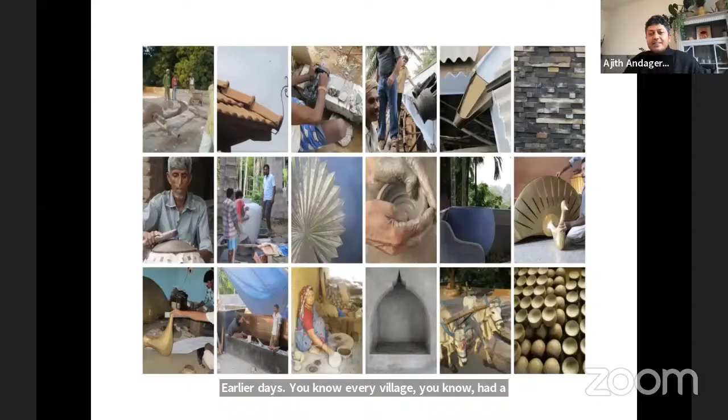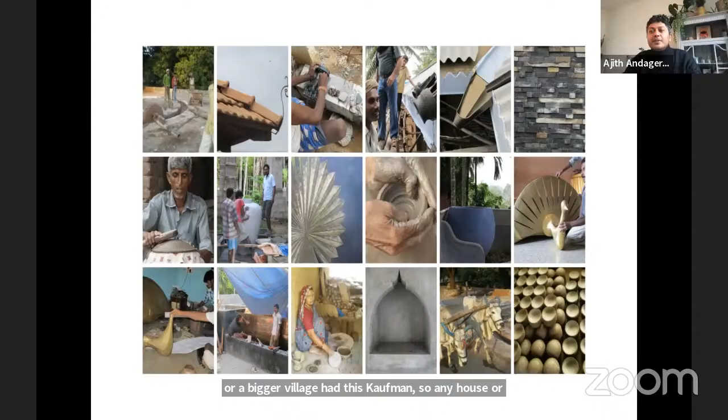So these are the images of various craftsmen. In earlier days, every village had a mason, a potter, a carpenter, a blacksmith, and of course agriculturists, who would need a house. So they worked with these 4 to 5 craftsmen. It was a barter system. Every village or bigger village had these craftsmen, so any house or building in that village or in the surrounding taluk or hobli was built by these people.

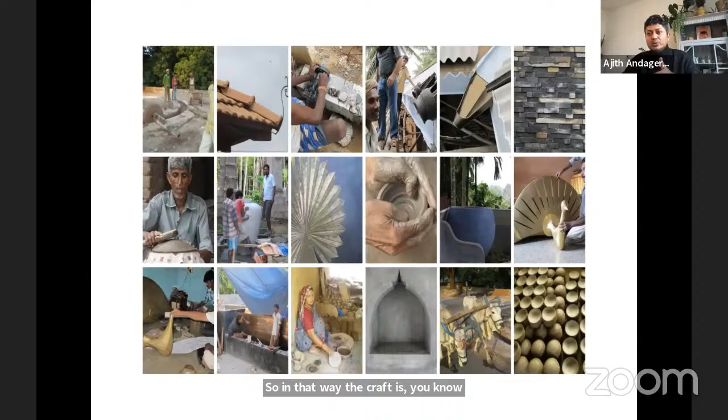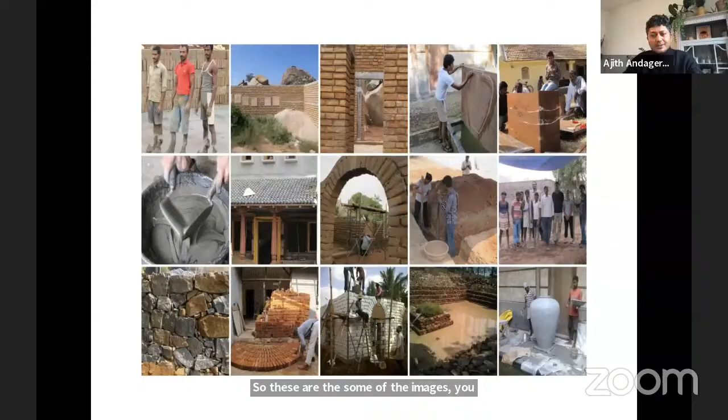So there was a craft developed over the years based on the climatic condition or the material available. In our projects today, we are trying to use these people to build modern structures. In that way, there is a continuation of the craft. Through architects and builders, we support this craft. These are some images from different projects of ours in various parts of India. We build mainly with earthen, local material. I will get to the material part a little later.

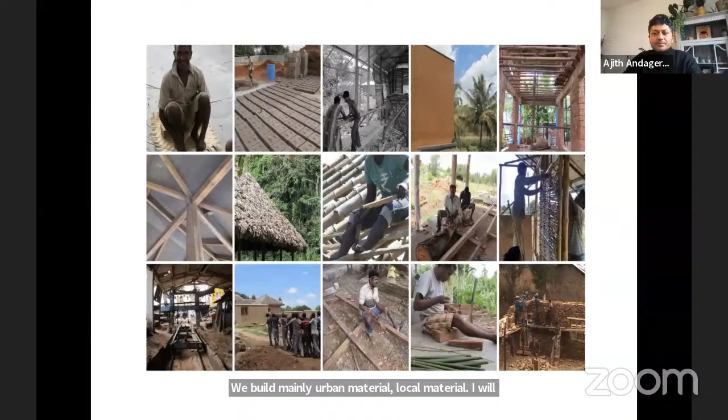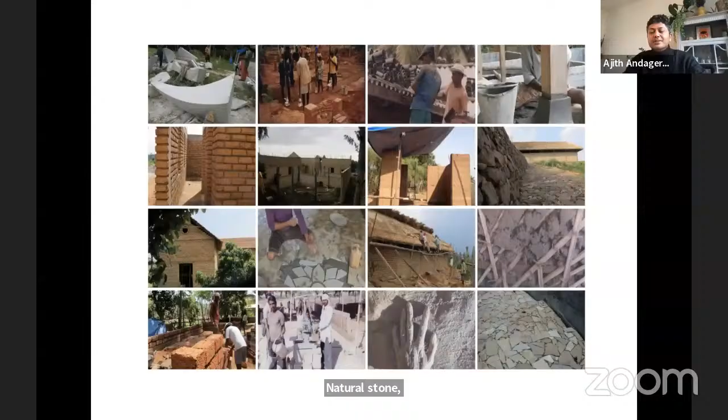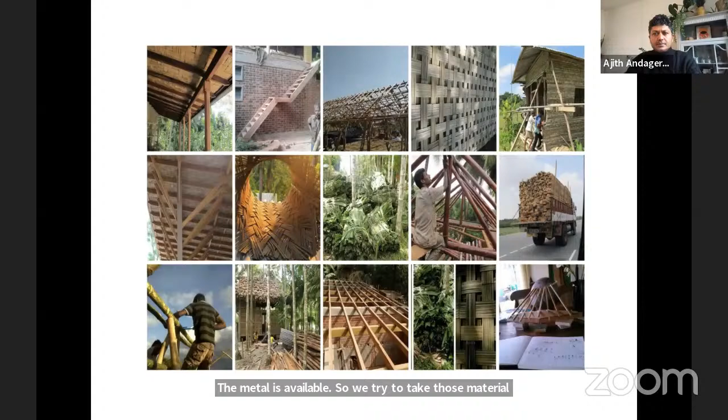You can see mud has been used, thatch, bamboo, cow dung, natural stone, laterite stone, granite, based on whatever material is available within a 50 to 100 kilometer radius of the site. So we try to take those materials to the next level in our buildings. We also extensively use coconut timber and arecanut. Coconut timber is a non-forest timber.

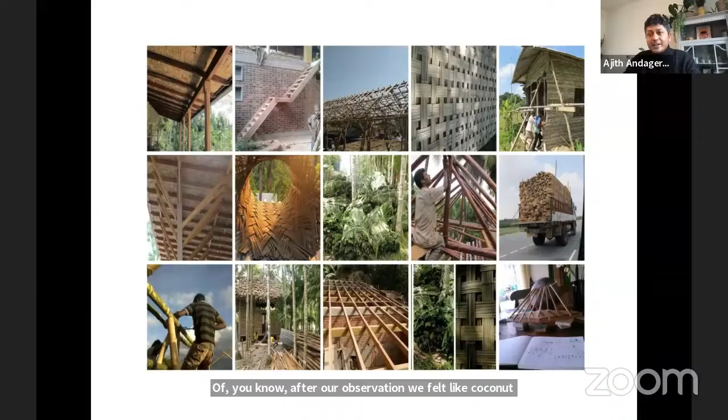That means we use wood, but we try not to use forest timber, because when we cut a forest tree, it has to be balanced. A lot of the time we don't have control over whether it's planted back. That's why we use a lot of commercial crop, where a farmer has a coconut farm. After 50, 60, 70 years, he's going to cut it and replant a coconut. After our observation, we felt coconut timber is amazing timber if it is utilized in the right way. So we are part of the whole life cycle of the tree, where we give a use to it.

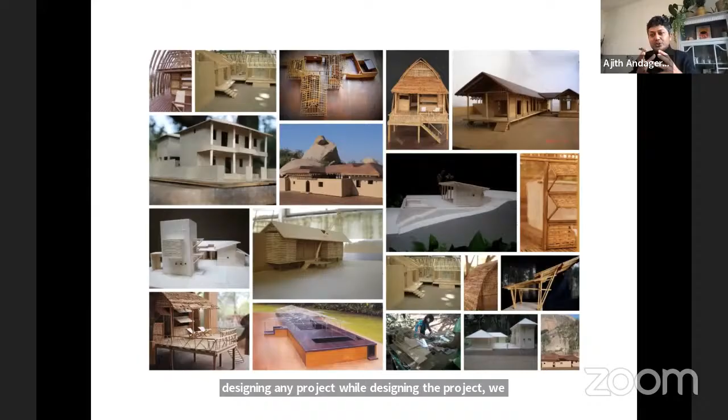These are some of the scale models we build. While designing any project, we build a study model to understand whether our design fits in three dimensions, the proportion, the height. The scale model is all handmade, not 3D printed. We still believe in building with hand, so we can relate the wall or the roof with a proportionate height. And once the design is finalized, we build a final model. It can be in wood, balsa wood or plywood.

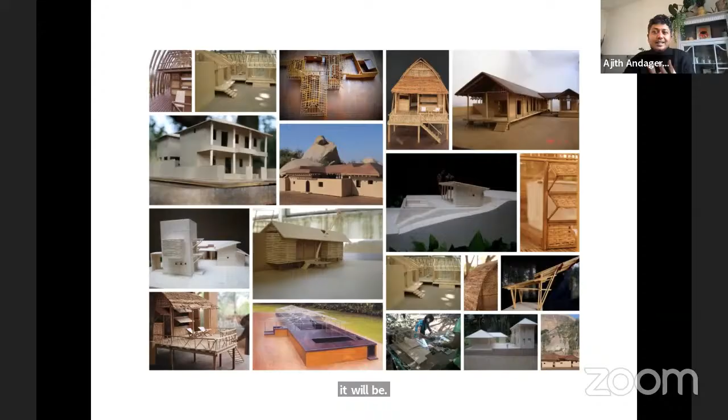Then, to a detailed level, we keep it on site. So a builder or a carpenter, even us, every time we visit the site, we understand what we thought of and how it will be. It will be helpful for the builders to understand, oh, this is how it looks eventually, not just by showing two-dimensional drawings.

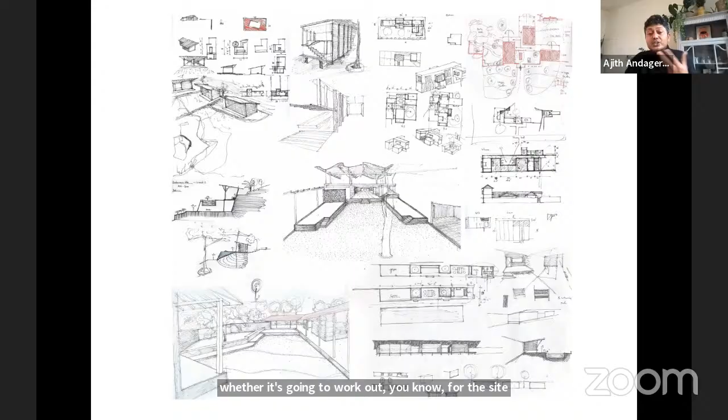At every stage we do a lot of sketching. So as an architect, what does an architect do? We are trained to visualize the entire form of a building before even building it. That's what we get trained in college and after in practice. So sketching is one of the very important tools. With just a pencil, you can be anywhere. You don't need to depend on a computer or any other tool. Whatever comes to your mind, you can sketch it, whether it's proportionate, whether it's going to work out for the site, how it looks from different angles. It's all in the sketches. These are the initial sketches we do to understand the process of designing.

So today I'm going to share about one project built by Andagere Architects. You all might have known or visited this project. It's the H. Narasimhaiah Science Museum near Gauribidanur.

This is a project funded by the government and a local committee. It's mainly for students of Karnataka and the country, where H. Narasimhaiah Science Society has come up with a project to build a science museum where it's not just blackboard teaching, but teaching through objects and models to educate the basics of science and what inventions are happening around the world.

It's an amazing step taken by the government and the society. So they've hired us to design this project. It's the first phase of the project. It's a mathematical and astronomy science museum. So as architects, after getting the project, we looked around in Gauribidanur, understanding what the weather is, how the rainfall is, how people used to build. So these are the local inspirations for us. That's what we do in any project.

We look around a 20, 30, 40 kilometer radius, because even today there are 50, 100, 200, 300-year-old buildings standing, which have withstood the challenges of time and weather and calamities. So right there we have a solution, a time-tested solution. We don't have to imagine or recreate or invent everything from scratch, but take what is available in the surroundings and take it to the next level based on today's needs and the technologies available to us.

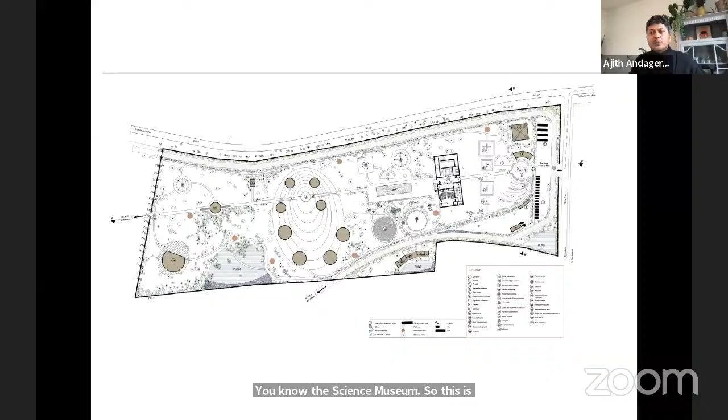So this is the master plan of the 16 acres where we designed the main building, which is in the rectangle, housing the auditorium and the curated science exhibition space, and the remaining part has the elements showing mainly how in earlier days people used to find time. We didn't have clocks then. So when you visit this place, you get to experience a lot of it.

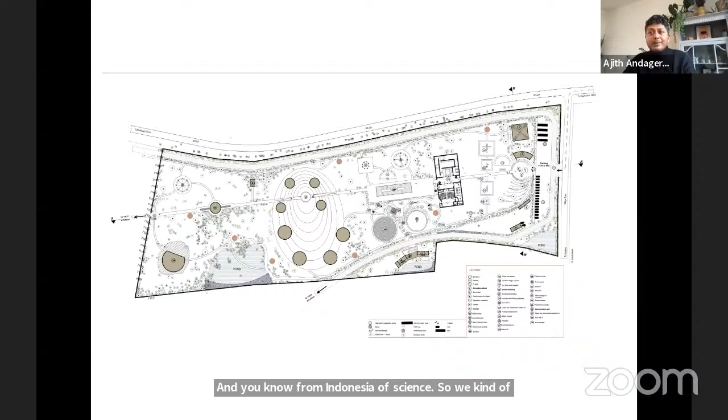So as designers working with the scientists from the Indian Institute of Science and different consultants, we got the requirements from them: what needs to be done, how it needs to be done, where it needs to be placed, because I'm not a mathematician or an astrophysicist. So by getting the requirements from them, we tried to give it a shape, how to build it so it lasts longer.

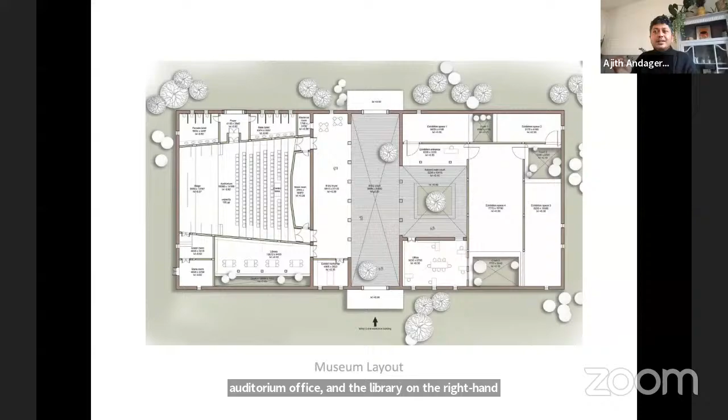So we took all those bylaws and guidelines into account while designing the library space. The central space is a street, part of the street where you enter. On the left-hand side is an auditorium, office, and the library. On the right-hand side is an exhibition space displaying various science models and objects related to science. So we curated the entire space.

Where would the students and people enter? What do they see? Where do they come out? As a designer, it's our duty to design all of it, not just the building. If 200 students come at a time, how does the space get utilized? Whether you keep them in batches, and when they come out, what do they see, where do they go—all this flow diagram, everything had to be worked out while designing this building.

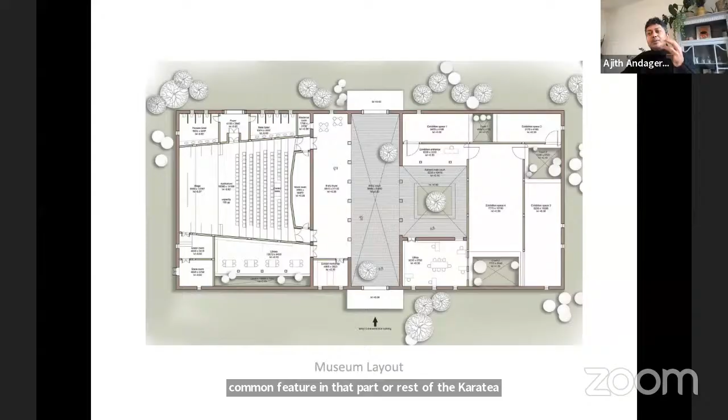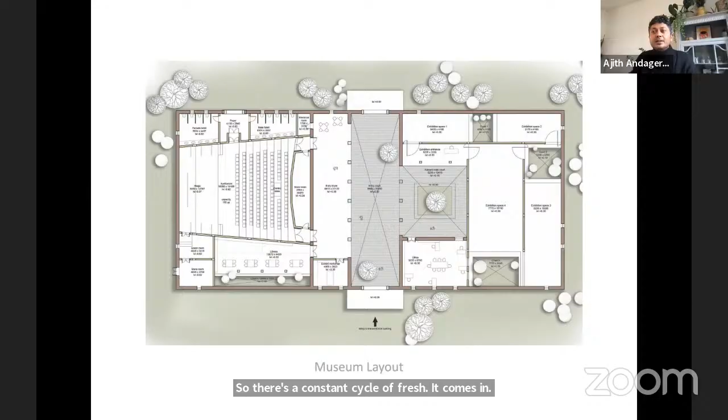You can see those circular shapes—those are the trees. So we created courtyards, a very common feature in that part of Karnataka, where it's a natural way of having cross ventilation. Cross ventilation means fresh air comes into the building and takes the heated air from the internal space out. So there's a constant cycle of fresh air coming in and going out, which keeps the thermal comfort inside cooler.

That's why we created courtyards of various sizes, to get direct and diffuse sunlight. If you look at some of the middle spaces, they don't have any windows, but we bring in skylight in a controlled way, which lights the entire space.

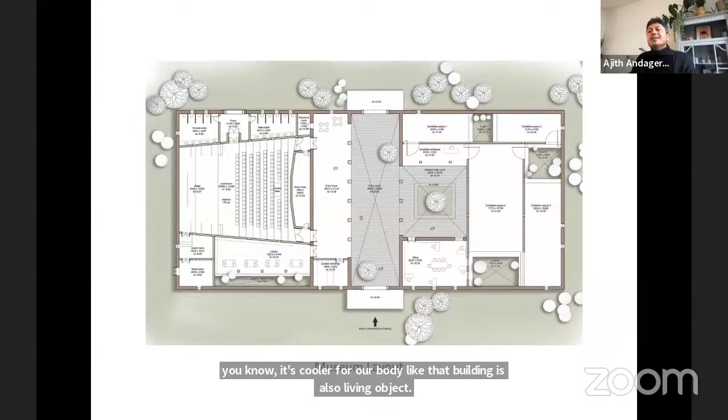Because of the hot and dry climate, temperatures can go up to 42, 43 degrees in this part of Karnataka. So we had to protect the building with an envelope, a skin—like we wear cotton cloth in summer because it's cooler for our body. Like that, a building is also a living object. It has to breathe, to create a comfortable environment for us as human beings to live and work. As an architect, it's not a solution to just build a structure and then connect an AC or a fan. That's just one alternative or a backup.

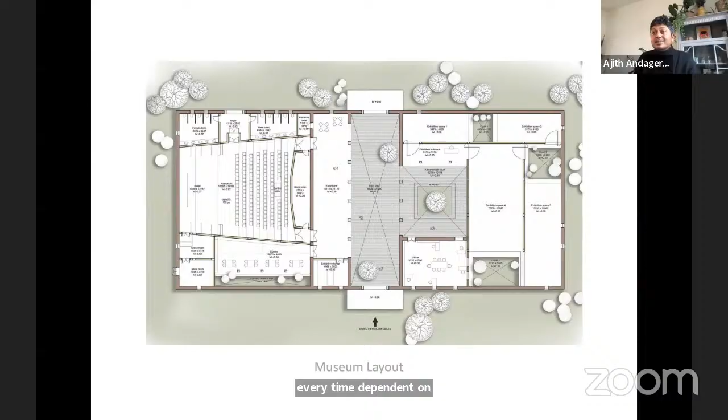Naturally, when we build any project, if it's in the Himalayas for example, it's cold, so how can the building naturally collect the heat of the day and release it in the evening so you feel a little warm? That way you don't have to always depend on mechanical, electrical energy. So in a way, that's sustainable architecture—working within what is available in nature to our advantage, controlling it so we feel comfortable inside.

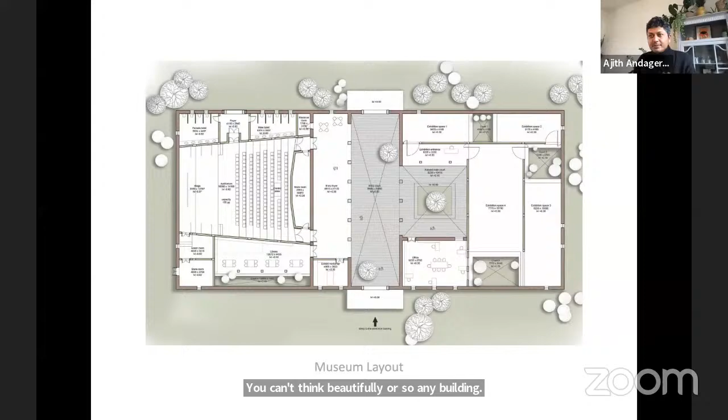When our skin and body feel comfortable, our mind also can be calm and at peace. A lot of the time when we enter a building we feel irritated because it's claustrophobic or very warm, there's not much ventilation, and you can't think freely or beautifully. So any building plays a very important role. I've observed that a lot of people, when they enter a house or building, the first thing they do is open the windows for fresh air to come in.

So this is the plan, and this is the scale model. We built a scale model for the project to understand the scale. This is the top view, and you can see we've taken photographs at human eye level, shown on the right side picture.

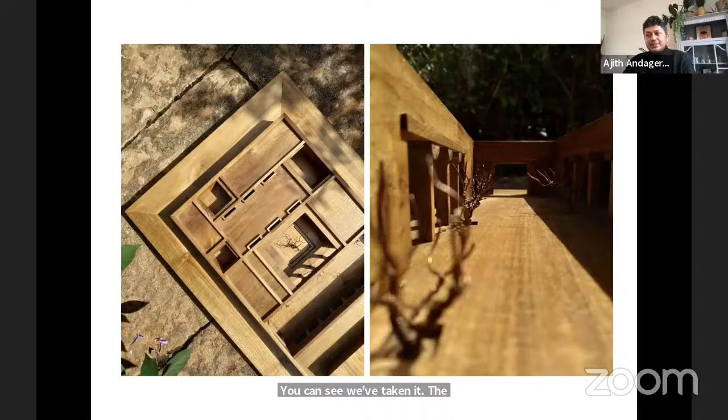So we studied the techniques people used to build over the last 1,000 years, which can have a 1 to 1.5 foot thick wall, becoming a natural insulation as a nice wall thickness, so the hot air doesn't come directly—it acts as a filter. Earth is a fantastic material which breathes like our skin.

For example, in summer when you go out, you sweat—that means your skin is breathing. Imagine if you take out the breathable character of the wall, it's like laminating ourselves with plastic. It's like you can't breathe, and you start sweating.

Same thing happens to any building. The moment the walls don't breathe, you start sweating inside. You must have observed this — these observations are the key.

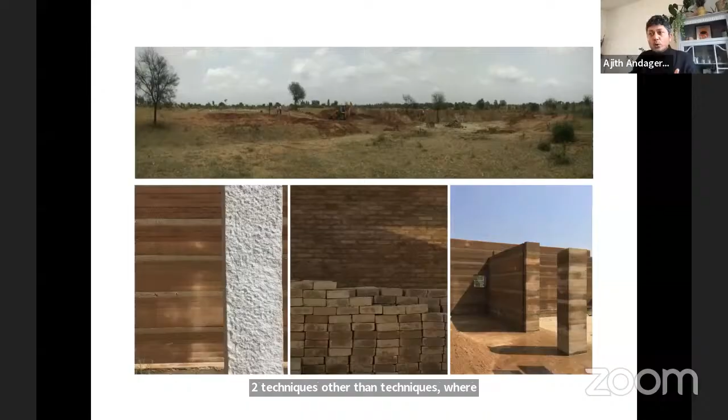So we used two earthen techniques, where the main one is called rammed earth, which is one of the oldest techniques used by humans all over the world. One of the oldest buildings existing today, in Spiti Valley, is built in rammed earth. Also part of the Great Wall of China is built with the same technique.

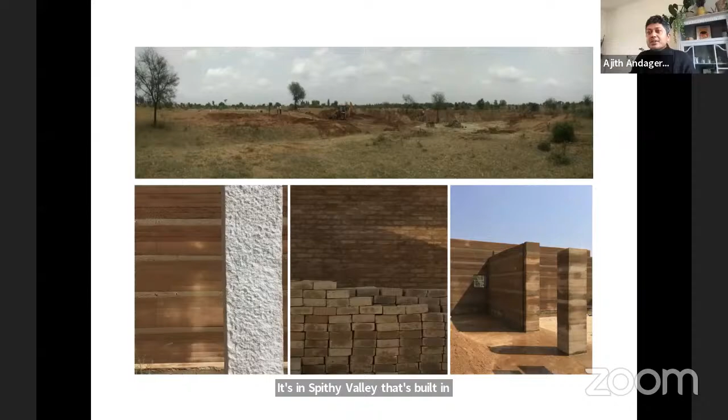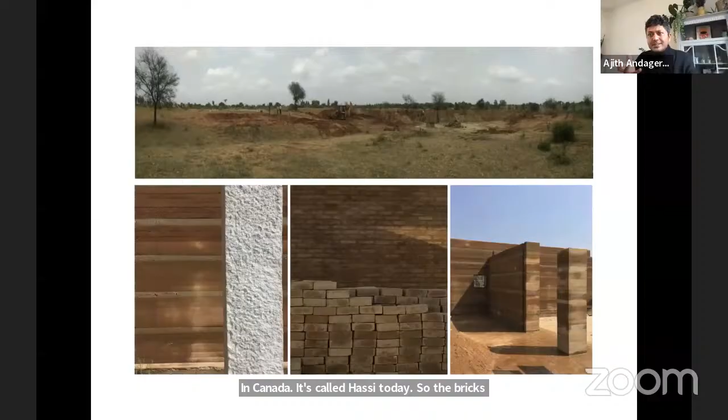And there is something called Adobe. Adobe in Kannada is called Hasi Itige. So the bricks we see today, red bricks, are all baked — you make clay, put it into a mold, and put it in a kiln to bake it. That's like terracotta or pottery, how it's made.

To make this brick you need firewood or coals, so you need energy, right? Today brick manufacturers use coal and sometimes fossil fuel. So we thought, what is the way to do this without burning the brick, a natural way utilizing the sun?

So sun-dried bricks, that's how earlier people used to do it. Any old houses, if you go out you see 40, 50, 60-year-old houses — not everybody could afford to buy burnt brick. So what they did, they themselves made their own bricks — every day the family would make 100 bricks after their work. That's how they used to build.

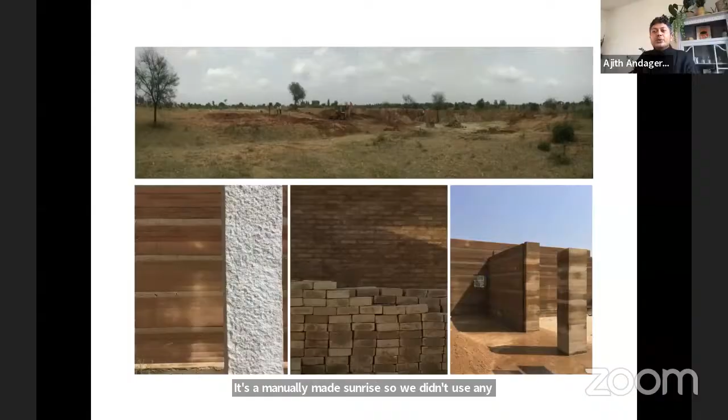So we use the same technique called Adobe. It's manually made, sun-dried. We didn't use any firewood or coal to burn it. We added lime as a stabilizer. And in the left bottom picture, we use granite, which is available in Chikkaballapur district, as the main structural pillar.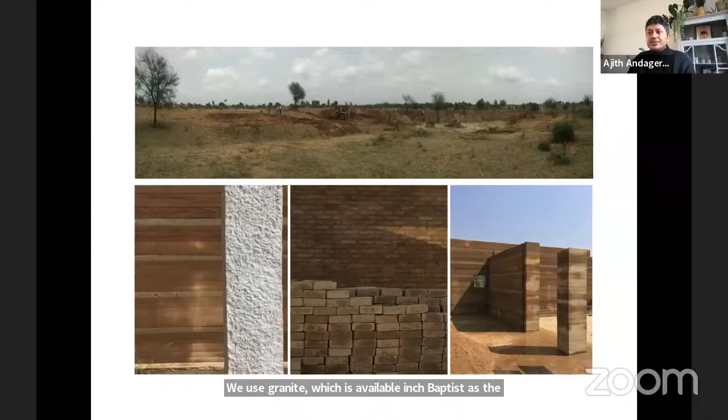So the right bottom is the rammed earth technique. You can see the images — we did a trial period first, where we tried various mixtures of soil, different colors, to see which is the suitable proportion — how much sand particle or clay we need to use, how much lime and how much water.

So we did a test — the left top and bottom show us mixing the soil. In the right picture we created a box out of plywood and wood, where you build whatever thickness wall you need. Here we chose 18 inches, 1.5 feet thick, because of the weather — we wanted a thick wall.

Again, that's an observation from the old houses we saw — they all had a thick wall. The moment you enter from outside to inside the house, there's a 4 to 8 degree difference in temperature. You start feeling cooler, and you feel like, wow, why? It's cooler there because of the thick earthen wall.

So we use the similar technique. First we tried 3 or 4 different proportions. Then the clients, and even the DC and the MLA of Gauribidanur, they all came and saw it, they touched it. They felt like, wow, yes, it's cooler, it's stronger. We even waited a few weeks to see how strong it becomes.

Once you build the wall, the next day you remove the shuttering, which is plywood — that's it, you don't need to do plaster, you don't need to do anything. The beauty of this rammed earth technique is you need one mason who understands the plumb line, tube level, whether the wall is in a straight line. The rest are just helpers, laborers with shoulder power to do the manual ramming.

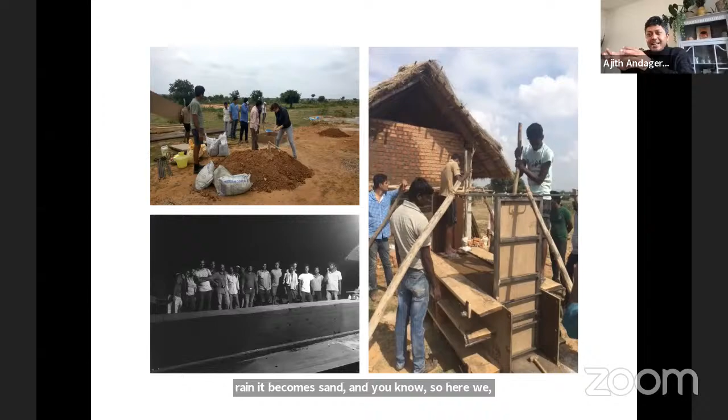Rammed earth is nothing but how soil and sand is formed on the planet. One major reason is granite — over millions of years, with wind and rain, it becomes sand. So here we are recreating from soil and sand, making a stone again. The wall becomes so hard over time.

You can see this image in the right bottom is the formwork, using wood and plywood. Wherever we wanted to build the wall, we build this first, up to 2 feet high shuttering. As you complete the 2 feet, you go again 1 more 2 feet, you go higher, whatever height you require. Then you complete the wall today evening, tomorrow morning you remove it. The wall is built.

You just need curing, with a spray of water for a few days, because we added lime. For the external wall, we added about 4 to 5% of cement, as a stabilization in case it rains. And also psychologically, a lot of people are asking, you're not adding cement, whether this building will survive or last.

We used to ask, okay, what's your grandfather's house? How old is it? 120 years. Is it still existing? Yes. How is it built? It's earth. Just pure earth, it's sustained for 120 years. That means there is something in it, right? So this is how the making of this science center's main envelope, the main outside wall, is done.

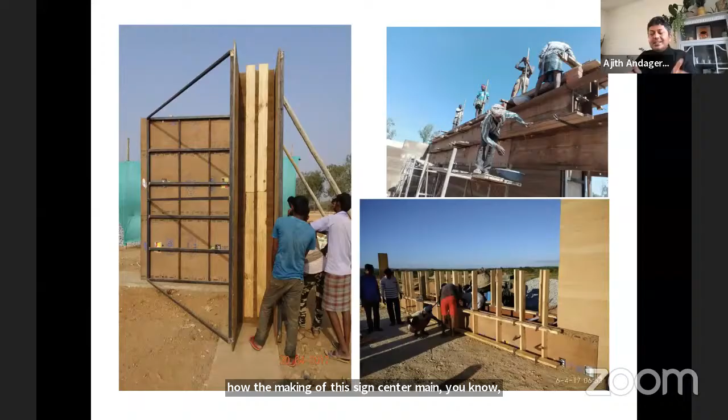The partition walls we build with bricks. On the left picture, you can see we are drying this adobe brick, the same proportion we use for the rammed earth. On the left top, that's the rammed earth wall already built. Here we're making the bricks and drying them. We dry it for almost 15 to 20 days. We keep it upside down, we cure it, then it becomes very strong.

On the right side picture, we used granite pillars, because granite - you must have seen a lot of government buildings in Gauri Bidanur or Bangalore, they all used it. Bangalore is a granite country, underneath us in Bangalore there's granite everywhere. So it lasts for thousands of years if it is used rightly.

We took that initiative because 100 years down the line, if you look at this building, people will be like, wow, 100 years ago people had that kind of techniques, they used it like that. Even we wonder now, some buildings from 200 years ago - how did they build it? What technology was available? We build it with today's technology, we use cranes to lift the stone. The same thing 100 years ago would have been something else, right?

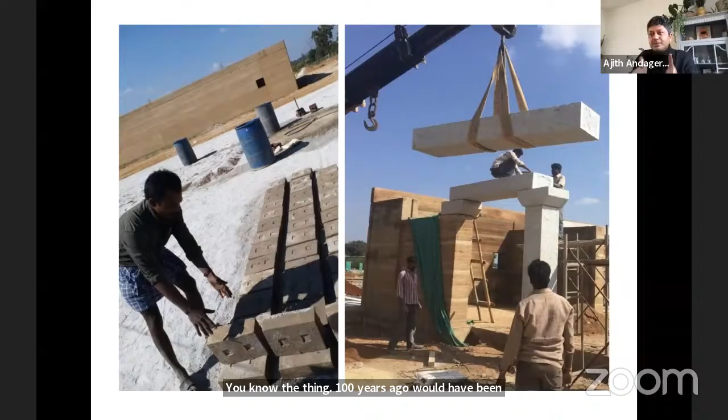So we spoke about today's time. We build it according to today's time. This is an image showing the adobe bricks stacked out - we build all the internal walls 10 inches thick, because the external walls we build 18 inches thick.

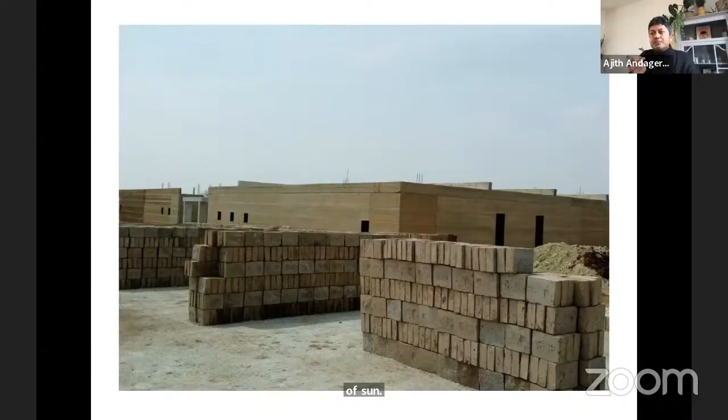That's the first contact of sun, so it kind of acts as a filter. It holds the temperature because it breathes, it becomes cooler inside, because earth has moisture.

Again, not a large opening - the moment you have a large opening, that means your space gets heated up, then you need to cool it. That's why we just kept a very slit opening. All you need is just to wash the wall. The wall we painted with a lime wash - lime breathes. We didn't go for any polymer based paints, we used the lime wash.

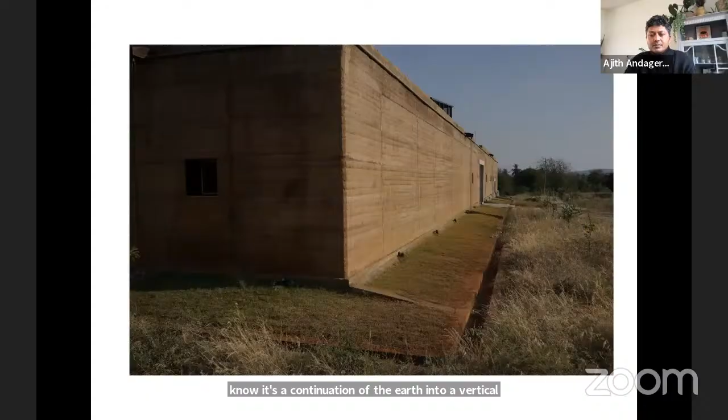You must have seen the anthill, the hutta, where it's emerged from the earth. It kind of looks like that. We had a visitor, a monkey, checking out the roof.

So now getting on to talking about Samrakshan India. In Sanskrit, Samrakshan means conservation. In this organization, we are trying to study how the common man used to build houses in different districts in Karnataka, different states in India. As an architect, to build anything, we believed that understanding how people used to build is very important. Schools and colleges don't teach a lot about this, so we created our own opportunity to travel and observe.

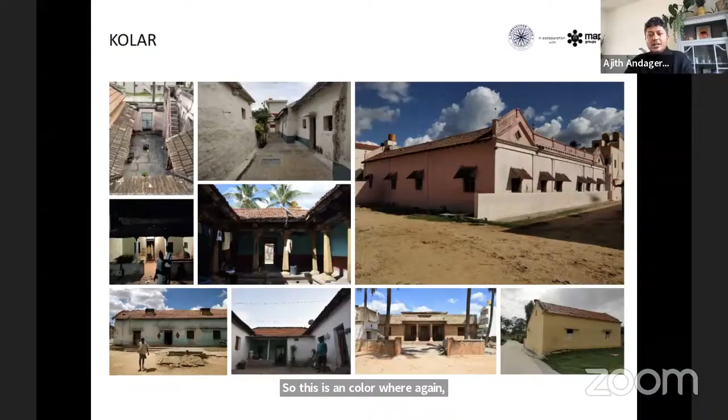This is in Kolar, where again, it's granite country. A lot of granite is available. It's also hot. These houses were built without engineers and architects. People themselves, the carpenters, masons, also had the knowledge of material science. They say to become a good architect, the last thing to be known is architecture.

That means you need to know about everything, like geography, botany, material science, chemistry, physics, mathematics. You need to have a fair amount of knowledge about all these forms of science, and psychology, that leads you to become an architect. Because it's a 360-degree observation, and also art and craftsmanship. In earlier days there were no architects, there were master masons. They were called master mason, or master carpenter.

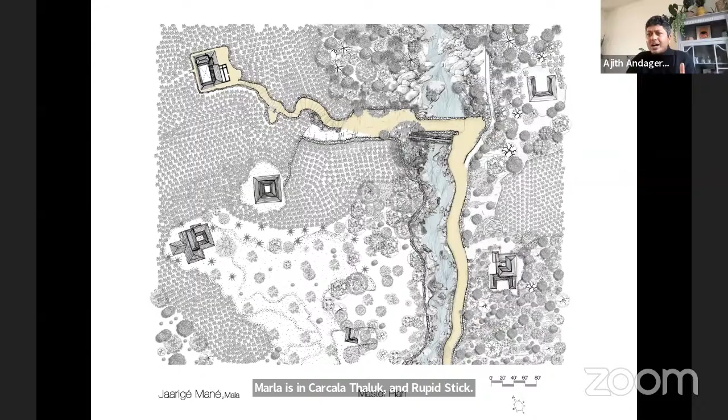So we're going to show one house we documented in Udupi district in Karkala Taluk, just to give you an idea. When I say documentation, many people don't have the knowledge of what documentation is. It can be various different kinds of documentation. So what we have done, I will show you. This is a house near Mala. Mala is in Karkala Taluk and Udupi district. We selected one house built about 150 years ago. It's called Jarige Mane, in the Western Ghats, closer to Kudremukh, and you also have humidity from the Mangalore side.

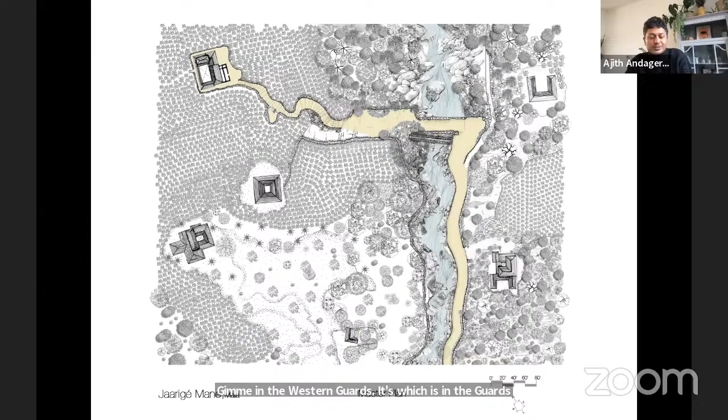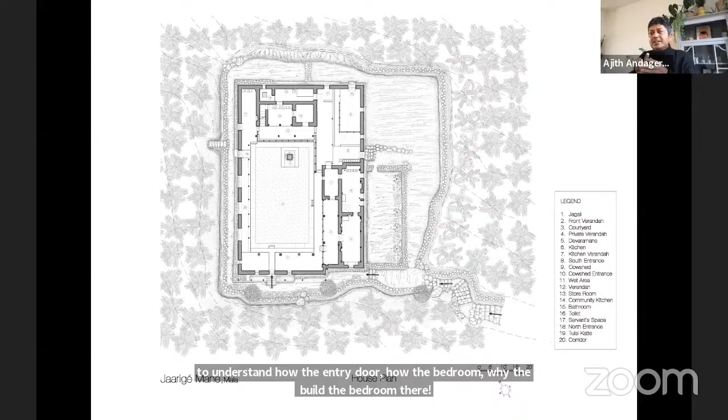This is the plan. So documentation means, to build a new house, we make plans, sections, elevations and all of it. Here the building is already built. So through tape and measured drawing, we understand the entry door, the bedroom, why they built the bedroom there, why the kitchen there. And those days they used to have a cow shed, kotige, inside the house for various reasons. One is safety and security from wild animals, and also the heat generated from the cows keeps the house warmer, and also the animal is holy. So the lifestyle was different compared to today.

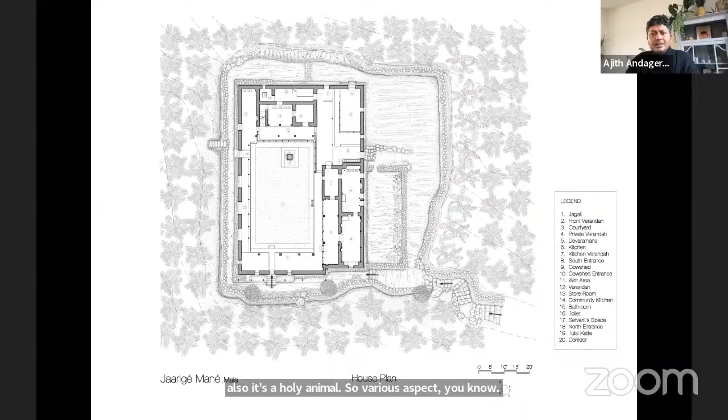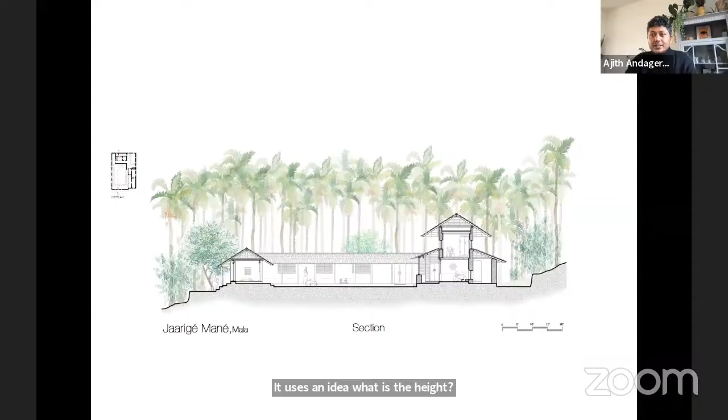This is a section, which is like cutting through the building. It gives us an idea of the height, the slope roof, the vegetation around. We used manual measurement with the tape. We didn't use any laser, because nowadays people use laser tape, but you can't relate to the distance. You stand at one point and just see it digitally. When you hold a tape, it's 5 feet 3 inches, then you're like, oh, 5 feet 3 inches means this long, or 6 inches means this long. So you can relate to that dimension, and also slowly start using your hands.

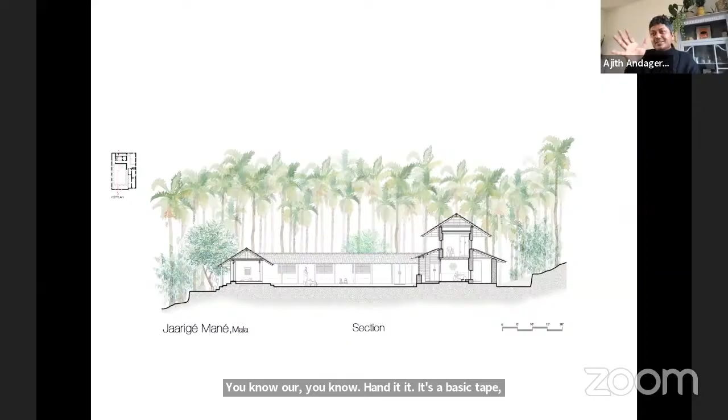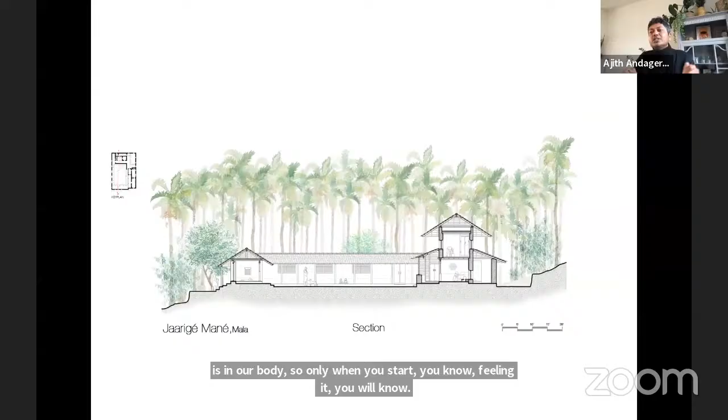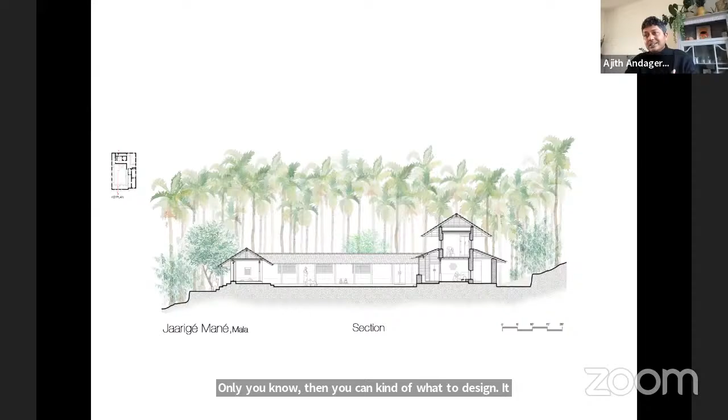Our hand is a basic tape. We have 1 inch, 2 inches, 3 inches, 4 inches, 6 inches, 1 foot, 3 feet. Everything is in our body. Only when you start feeling it, you will know. That's why we still use the tape measure, for the person holding the tape to understand. For an architect, it is very important when you're visualizing, okay, the room will be 12 feet by 15 feet. You need to know what 12 feet by 15 feet means. We need to have that quality. Only then what you design will be the same on the site. This is what you learn in architecture and in life as well.

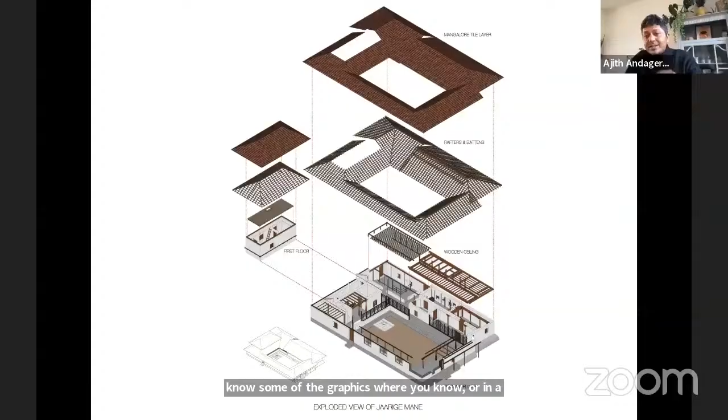So this is the detailed exploded view. You must have seen in Cartoon Network, or some graphics, or in a machine drawing, where everything is exploded and joined back. Similarly, it helps to understand how the foundation, the wooden column, and the roof are built. It's a very technical drawing.

So this is the real image of that house with the courtyard and the tile roof. I won't get into detail of it. It's just visuals, for you to understand how the house in Karkala Taluk was built.

This wall's built completely with earth, which is soil, mannu, except the Mangalore tile, because after about 50, 75 years of building this house with a thatch roof, they moved to a Mangalore tile roof, which is available within 60 kilometers. Then the transportation was developed.

But when the house was built, they built the entire house with what is available within 2 kilometers, or even less than 2 kilometers. Earth, stone, wood was there in the farm. And the thatch roof was available. Thatch was available from arecanut, adike mara and coconut timber, and the grass, paddy. They used to grow batta. So this hay from that. So they created a building.

And that's the mud wall. It's a different form of mud wall. It's called cob. This right side, they used to have a sagani sarso, like a cow dung flooring. Then cement was introduced, about 50 years ago. Then the maintenance issues. So they used the polished cement floor.

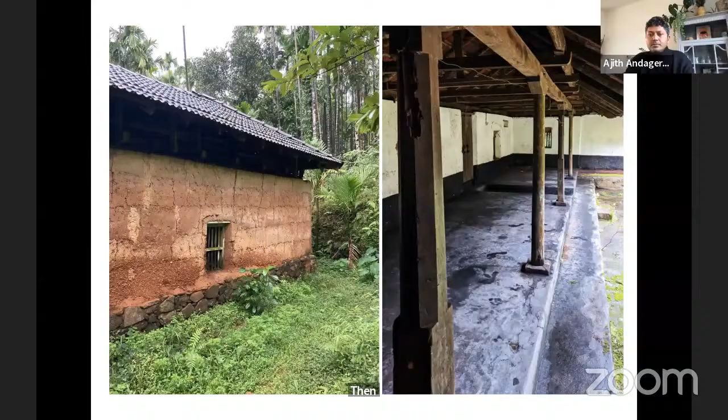So the building also took modification in time, new technology, but the core remained the same, which is the wall and the wooden structure. This is the cow dung plaster.

This is the kitchen. So that's why Rangoli, it's a Brahmin family house. So they had all these practices before cooking. You take a bath and keep the space clean. That's the practice. So you can see this is the kitchen. Everything is firewood and you sit on the floor. That's how they used to live.

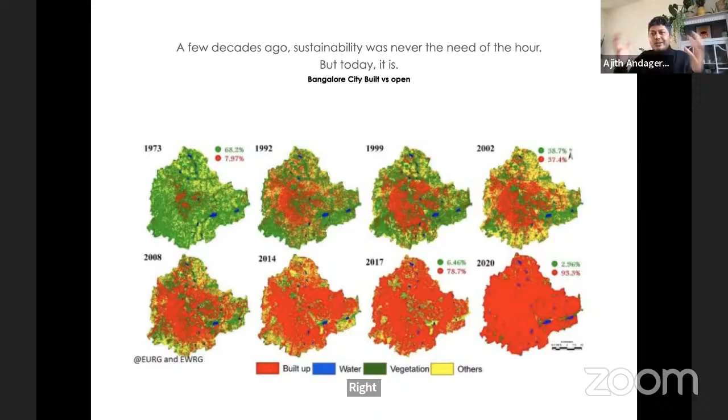So small thinking. They say, alilu seve malalu bhakti. Every drop of water becomes a river. So it's our duty to take those small steps, which at a society, at a macro level, can make an impact. Imagine 1 lakh people carry their own handkerchief. That means when you go out to a restaurant or anywhere, you saved 1 lakh or 2 lakh tissue papers on that day, right? So like that, small dots make a big circle. So how are we prepared to face this crisis through this?

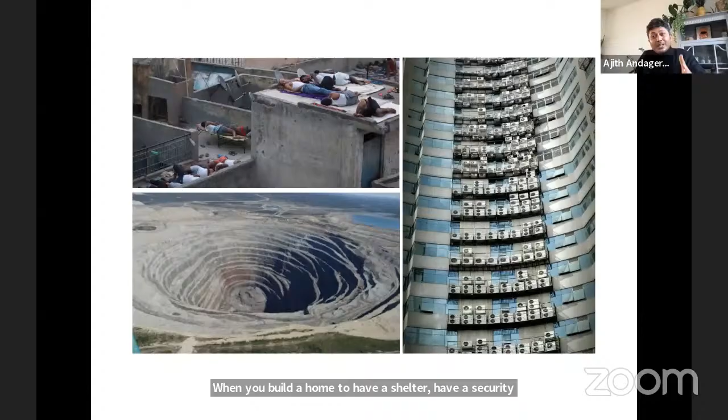So these are some of the images. Left top, you build a home to have a shelter, have security, to sleep inside comfortably. But today we're building with industrially produced materials, which also emit energy back, heat. So you build a house, in summer you can't live inside, so you sleep on the roof. Then does it make sense in the first place to build a house, right?

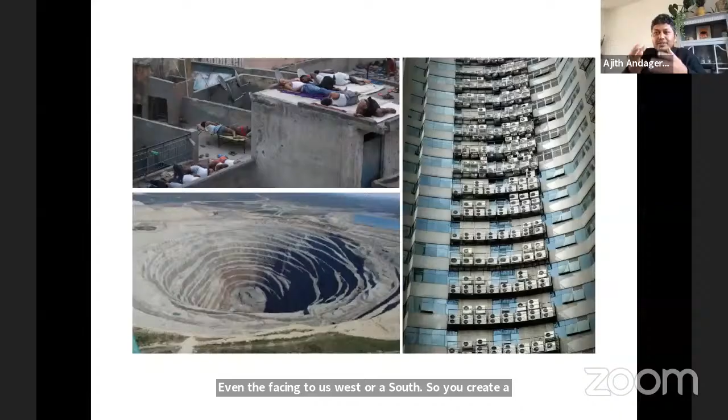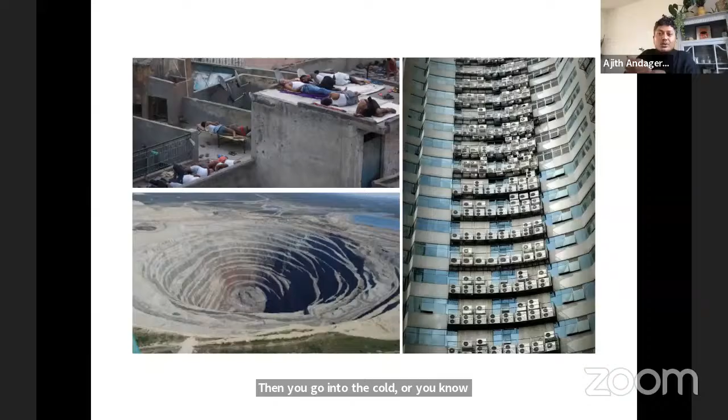On the right is an example in Bangalore where you have a glass structure, even facing towards west or south. So you create a problem and try to solve it. Then you depend on mechanical or electrical energy, air conditioning. That means that building, that person needs extra electricity for that day. That means government has to produce more electricity. Do we have enough hydroelectricity or solar? Then you go into coal. So, small problem. Then at the source itself, while designing the building, can you tackle this issue?

Construction is one of the major polluters in the world. So talking about sustainability: avoidance of depletion of natural resources in order to maintain an ecological balance. We need houses, our population is growing, so we need to think which way we can build, which way we can balance the nature. So research and creativity and innovation with long-lasting passion. You develop a passion, you see it through. There's always the light at the end of the tunnel.

In today's generation, people are hopping: I like this for 6 months, suddenly you go on to something else. So they require continuation, finding your passion and seeing it till the end, where something will come out. In sustainability, that is what's required, which balances our ecosystem.

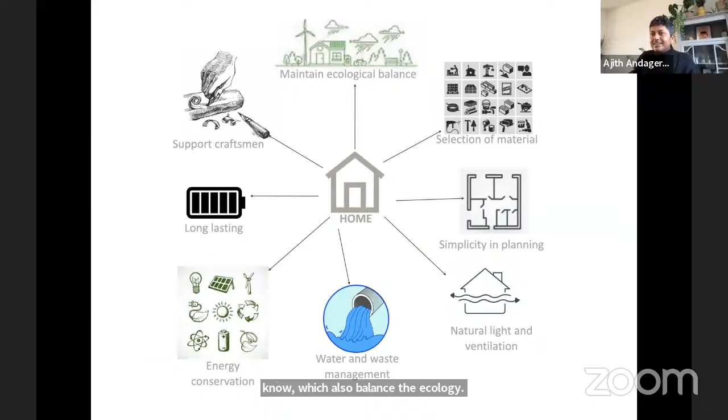So addressing sustainability at a home level, as I said earlier, will impact on a society level. To build a house as an architect, as a builder, as a homeowner, these are the points to keep in mind, which also balance the ecology, our natural resources. So again, the bottom line: simplicity in living. I have so much, do I need extra because marketing is happening online? Do I need to buy extra?

So I'll just give you a little brief about what is architecture and why architecture is important. At its roots, architecture exists to create a physical environment. You can read it. So how can architects contribute meaningfully to societal problems? Planning of cities to minimize pollution, increase physical movement, combat a sedentary lifestyle, increase green spaces and parks. As architects, we look into all these aspects.

How can architecture solve social problems? I typed this on Google to understand the role; somebody has already written it, so it's easier to share. You can read more about the role, not just as an architect, but as a responsible citizen, as a responsible human, our duties in society as an individual, as a family person, as a community person.

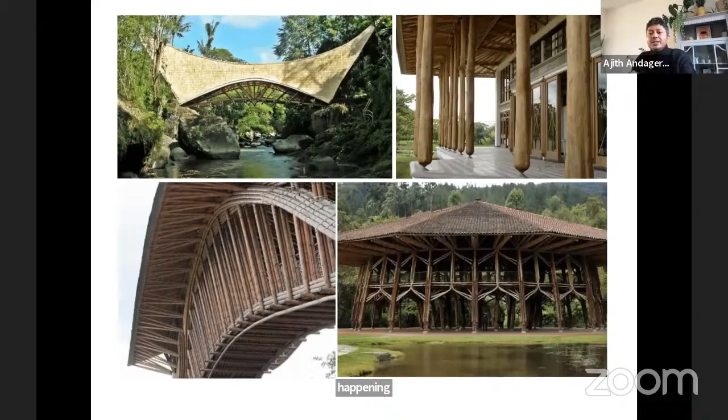These are some modern buildings, for example, using bamboo. Innovation has happened from young architects and young engineers using natural materials. Bamboo you plant today, in 7-8 years you can harvest it. You plant it again. So there is a balance.

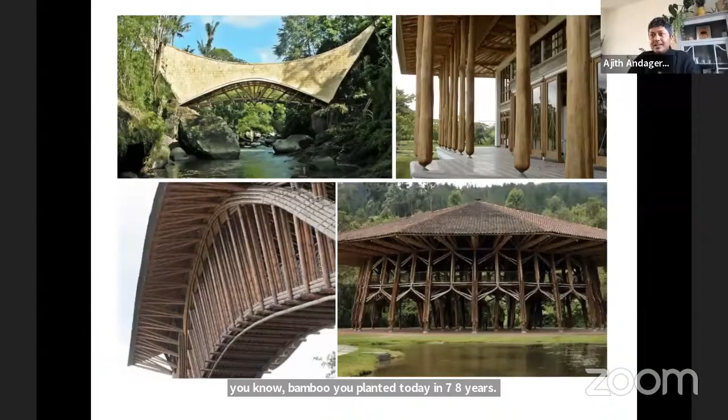For example, if you use steel, once you excavate the iron ore from the earth, I don't think it's going to come back in our lifetime or another 1,000 years. So that's the end of the story. Where do we go then? That's why bamboo or wood is ecological. You cut it today, you plant one more, in 30, 40 years you can recut it again. That's why it's a balance. That's why it's ecological.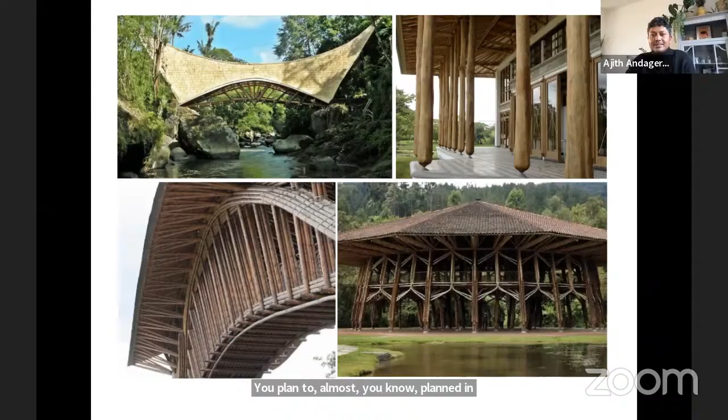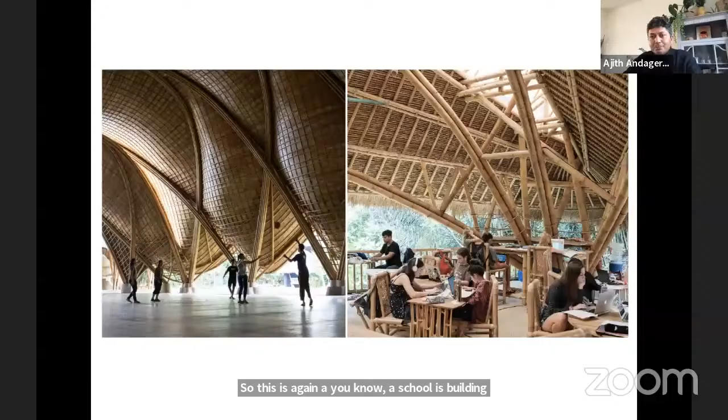So this is again a school built in bamboo. Massive, in Bali, Indonesia, they've used only bamboo and thatch to build a 21st century school.

You must have seen huge hangars or industrial sheds built with steel roofs nowadays. But in different countries, they're using wood again to build that large span structure. Even for an aeroplane hangar, you can replace the steel and build only with bamboo or wood. So that's why passion, belief, and innovation are required.

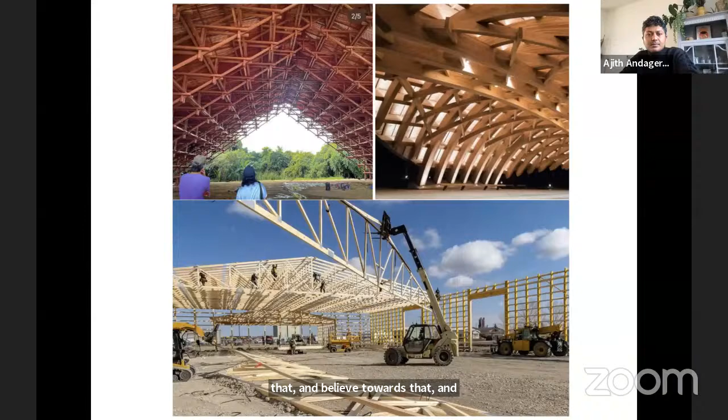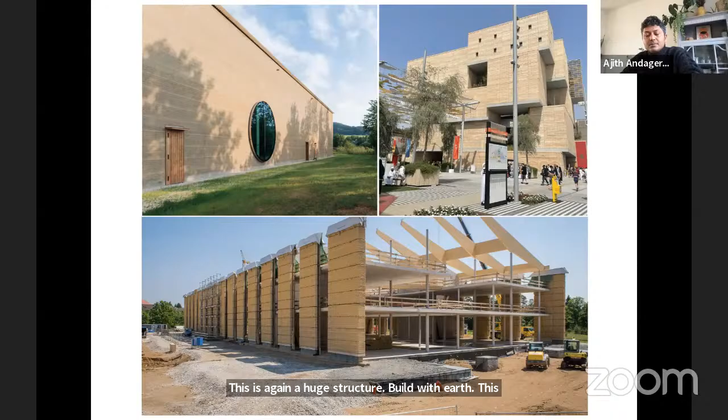This shows some of the other techniques where around the world people are using, in the 21st century, a simple technique to tackle the weather and find balance with nature, to live with nature.

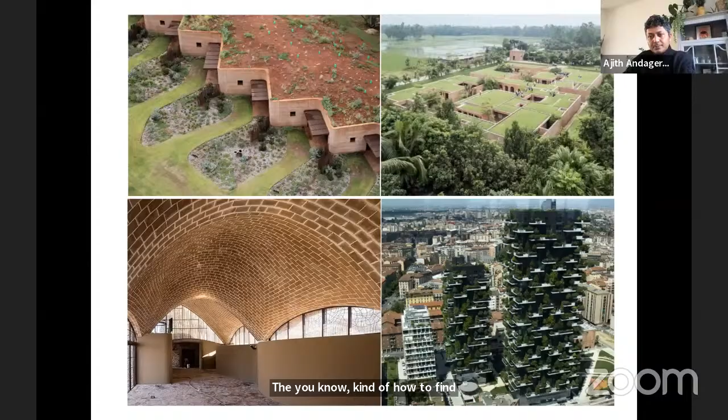I end this presentation with a very famous quote from Octavio Paz: 'To be truly modern, we must first reconcile with our tradition.'

That means we can't forget our tradition, our culture. It doesn't mean you stay back in that. Our lifestyle, thinking, demand, everything has changed through innovation, but go forward carrying our roots, carrying our past, wherever your roots are from, in any field, it doesn't matter, not just architecture. Carry that observation, carry our ancestral knowledge, which is all a continuation, so carry it forward. That's what this sentence is all about.

And at the end, less is more. Living with limited, what is enough? That's enough, so I don't need more. I'm living comfortably. That is a solution for various problems we are facing in the world today.